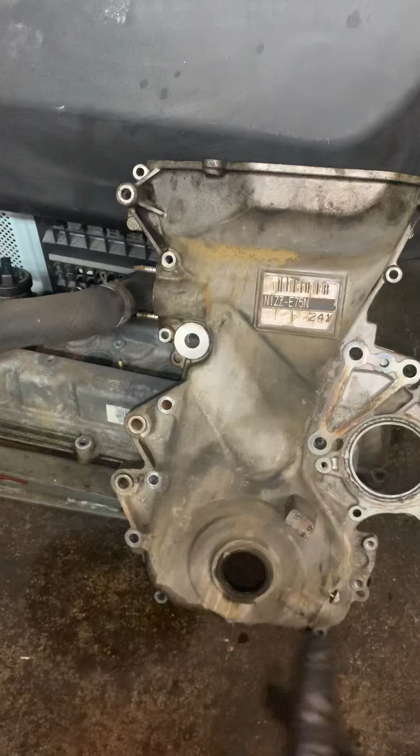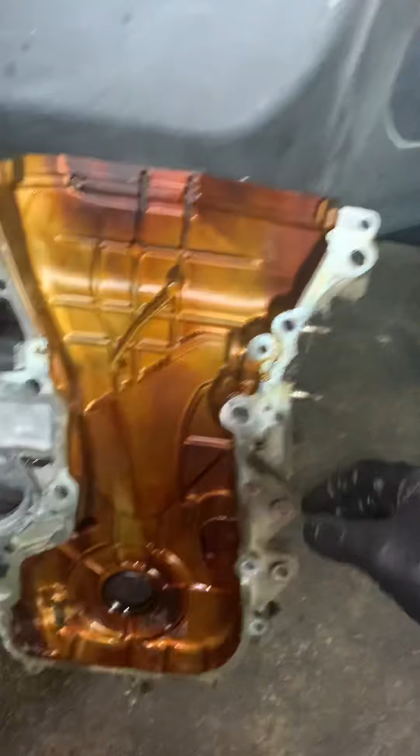Okay, so we're doing a lot to it. We're doing the timing chain. I'll start by showing you the cover that I have off over here. The timing chain was rattling inside of the timing cover. Your tensioner goes in here, and it's like a mechanical tensioner, and it goes in here and puts tension up against the chain, and when it gets loose, the chain will get loose and rattle up against here, and you hear rattling.

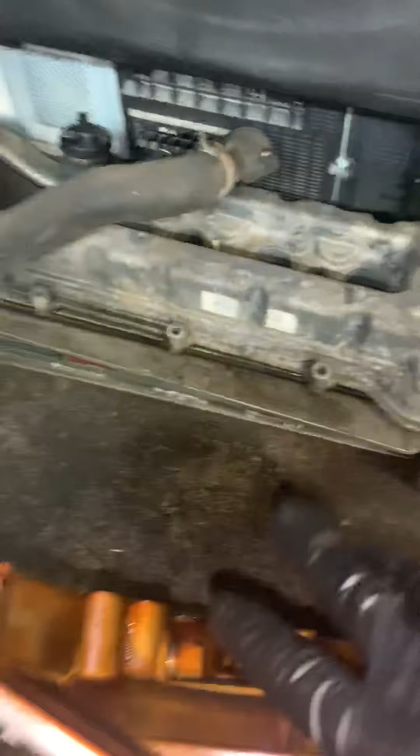So we caught it in time. I've seen it where people wait and keep driving it, and this will all be scarred up inside from the chain rattling up against it. Yeah, so we'll be doing the water pump, the new timing chain. This will be getting painted. The valve cover there looks crappy, and that'll get painted too.

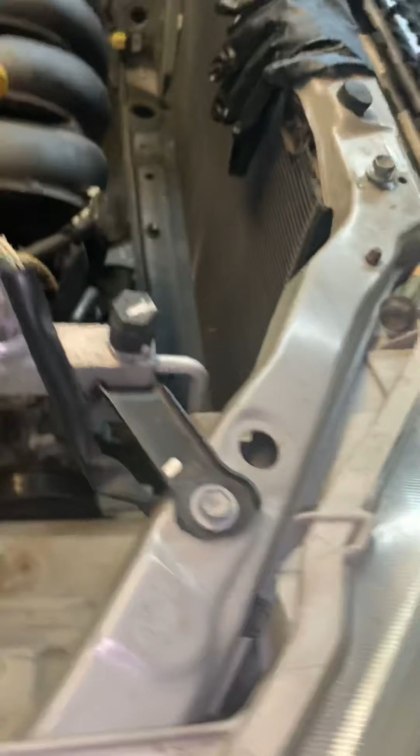Got the radiator out just to have a little more room to work with, because I have to lower and raise the engine, and I need that extra room there to move the engine around. So the inside of the engine is not horribly sludged up. It actually looks pretty clean.

I use this compression gauge tool.

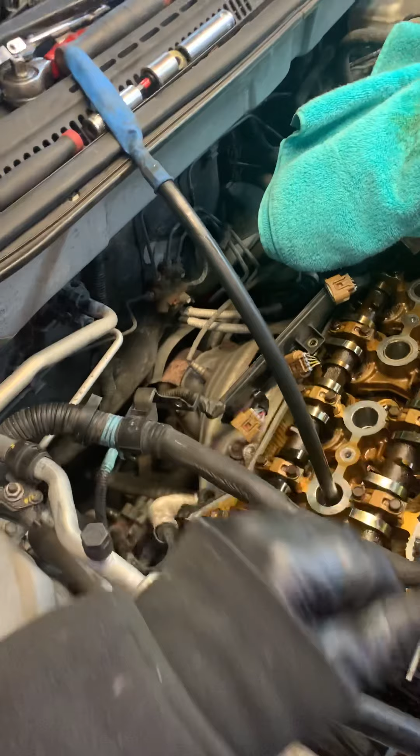Oh, excuse me. We're yawning on y'all. Been doing some late night work on this because I have other stuff going on in the day. Anyways,

I got this compression gauge tool in there, and I take the compression gauge off and put a little balloon in it. And the reason why I put the balloon in is because as I'm rotating, I'm looking for when that balloon fills up with air in cylinder number 1, and I know I'm on the compression stroke. Just a little thing I do to verify, to double check that I'm on compression stroke.

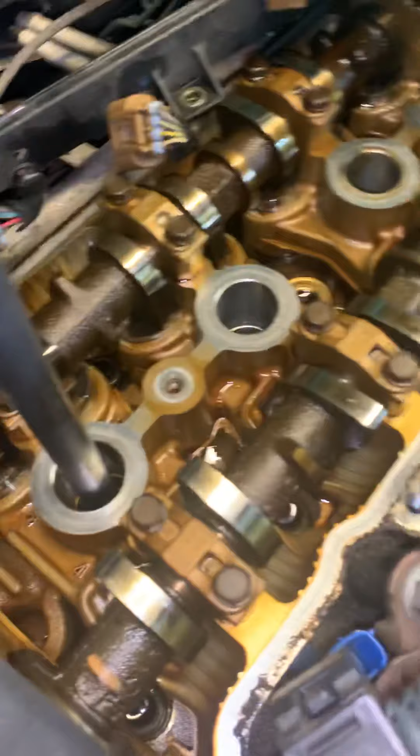Now you could also check if you're on compression stroke by looking at your intake valves to see if the lobes on them are up and if the valve is closed or open, and you could see that. So that's how you know the position of your valves. Then it has timing marks on the top, which I'll show you in a minute.

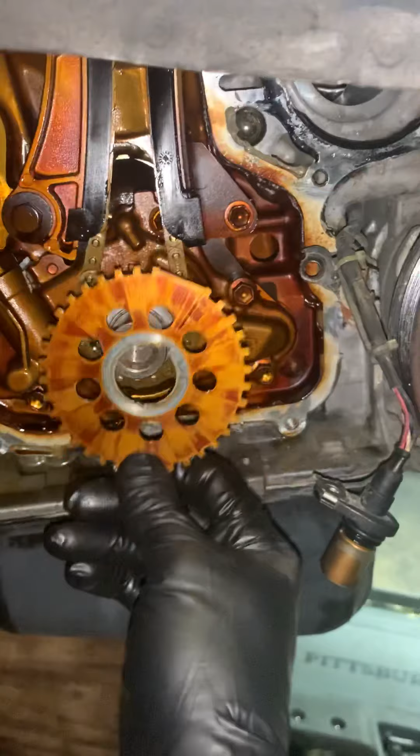Now that it's down, I'm going to show you the timing marks on the bottom before I jack it up. And so this obviously has the keyway, and the keyway only goes in one way, and then you have this letter F right there, and that letter F should be pointing up from what I read online. So then you'll take that off. It's pointing up the way it should. Set that out of the way, and then I'll show you the other timing marks behind there on the sprocket.

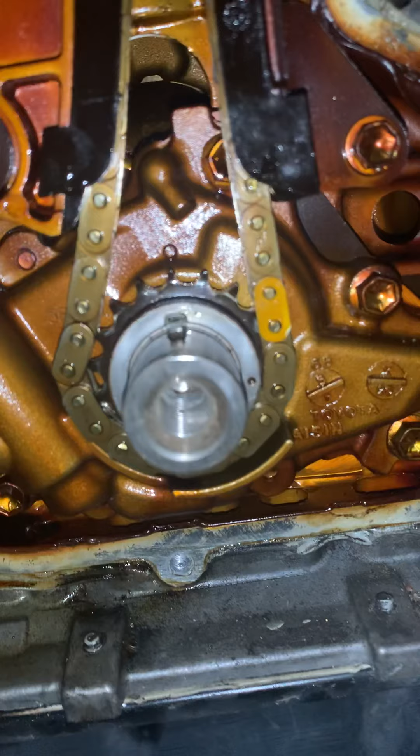See if we can get this crappy little iPhone to focus. Okay, so you see the marks. The mark here on the keyway lines up with that dimple back there. And then you have another mark over here that comes off to the side. So there you go. And the chain is obviously loose because the tensioner is off. That's the timing you're looking for on the bottom.

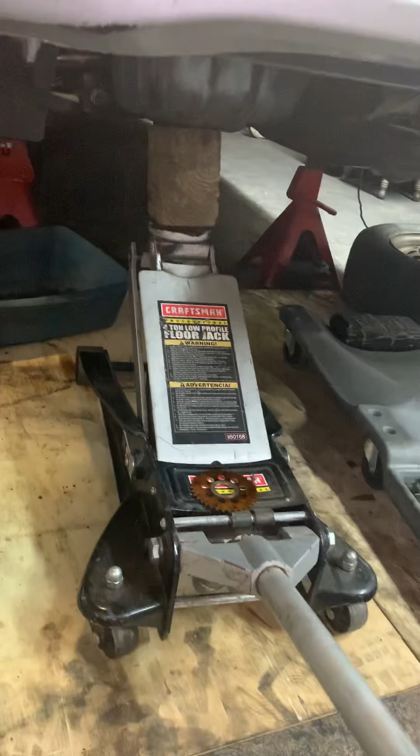You want that dot at about 3 o'clock, and then you want the keyway at 12 o'clock lined up with the dot there. Then you're gonna come up to the top here. Got our 3-ton jack on a piece of wood on the oil pan. And I'm gonna bring it up as high as I can. It looks like this piece of wood wants to slip, but it'll hold just long enough for y'all to see.

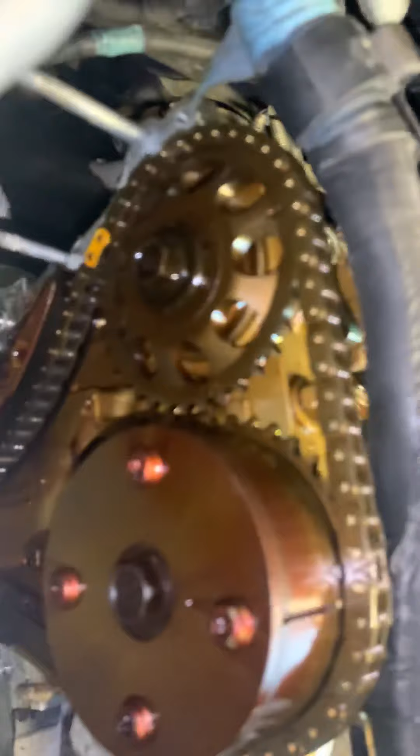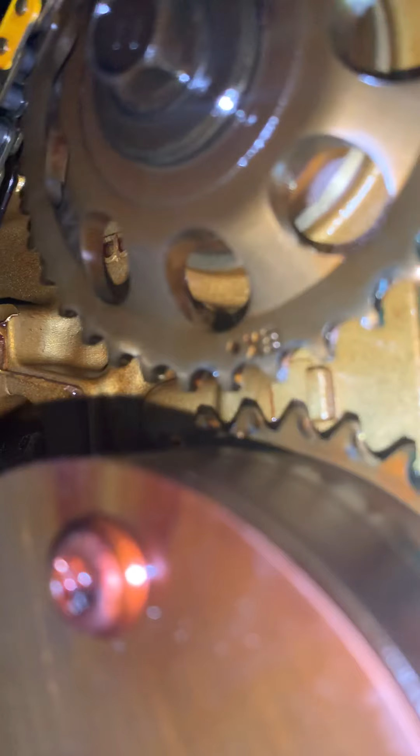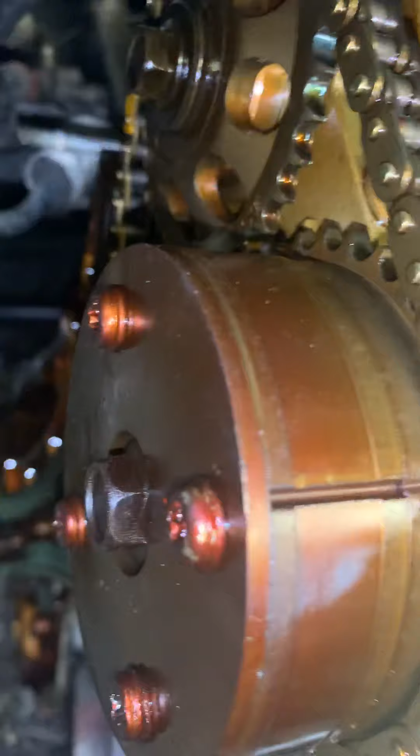Okay, so yes, I have to rotate the phone. So you see this dot here, you want it up at 12 o'clock, and then the other two most important dots are those two, the EX dot with the other dot across. You want them lining up. It looks to me like this mark matters too, like you want that mark facing up roughly about 12 o'clock like you do on that dot over there. So, and then the rest is just chain and guides.

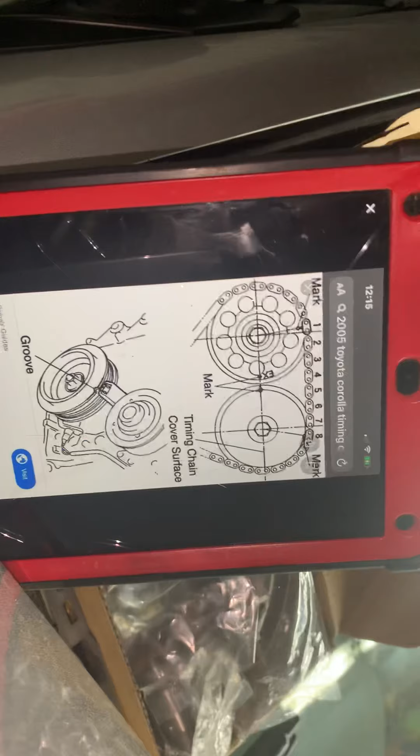So if you see here on my iPad, those are the marks they're displaying. They got the dot slightly off of 12 o'clock, and this one slightly off, but they're mainly focused on these two being straight across, the EX marks.

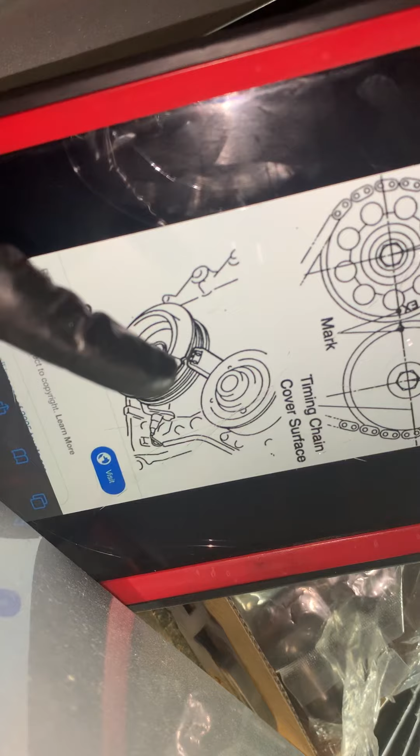On the timing cover with the crank pulley, you want the mark to line up on that also, which I did before I took it off. I made sure, and I'll show you that over here. And so your crank pulley is gonna have a little mark in it, and I just kind of made the mark a little more visible with a knife and a Sharpie. And you want that mark to line up on 0 over here, like that, before you remove this crank pulley and this timing cover.

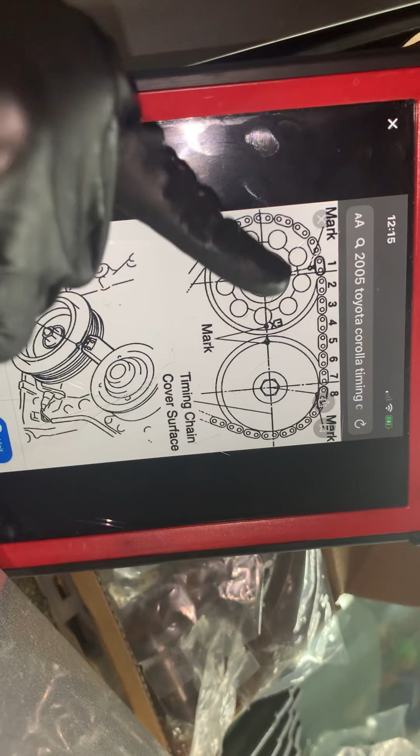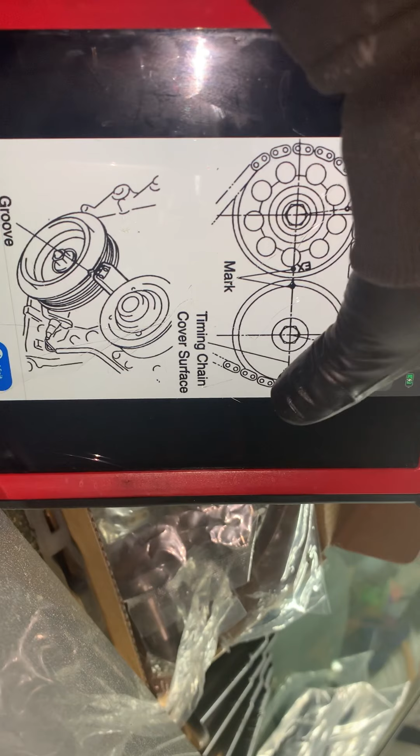And so when that lines up on 0 there with the timing cover off, you can see at the top of the timing cover, and you can verify that your two top marks have the EX dot across from the other cam gear. You have the VVTi on the intake side, which is this side, and then you have the exhaust on this side.

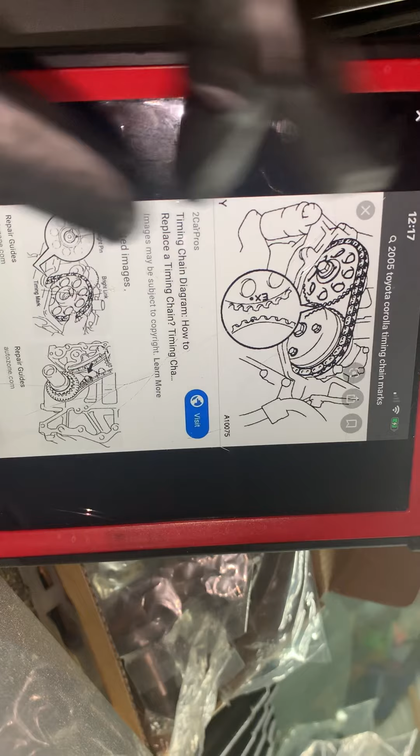So once those line up, they show you some other stuff here too. The marks on the bottom, the guides. Again, just talking more about the EX marks lining up there. Those are pretty much the most important. These are all your tightening sequence on the bolts for the cover.

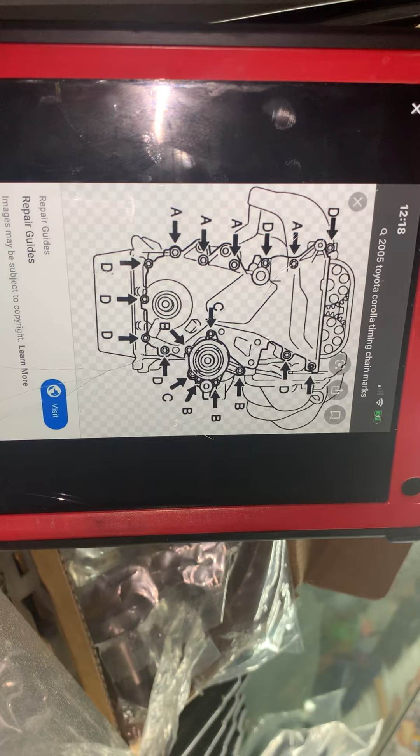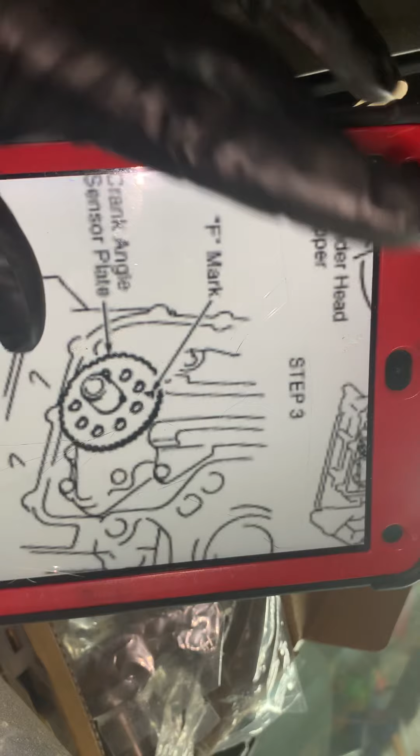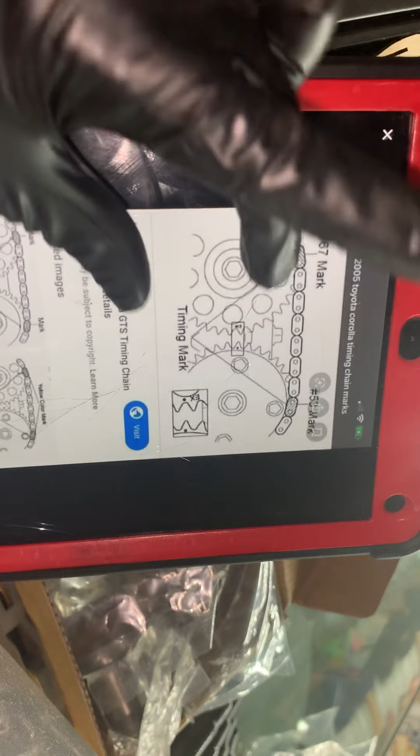There's the letter F pointing up, and your crank angle sensor plate. I already showed y'all that. Here is the tensioner, where it goes on to the guide. That's pretty simple to understand. And then here is your marks, and they're giving you the teeth count on the new chains because they'll come marked. And you want the center mark and the teeth here, and then the teeth marks to line up at the top. So that's pretty much it. Yeah, that's pretty much it.

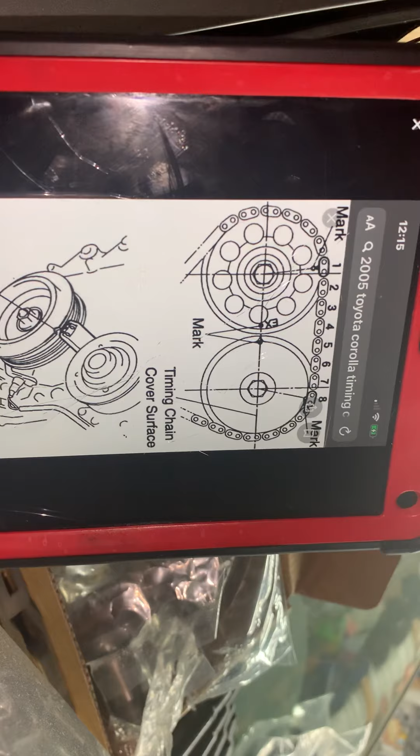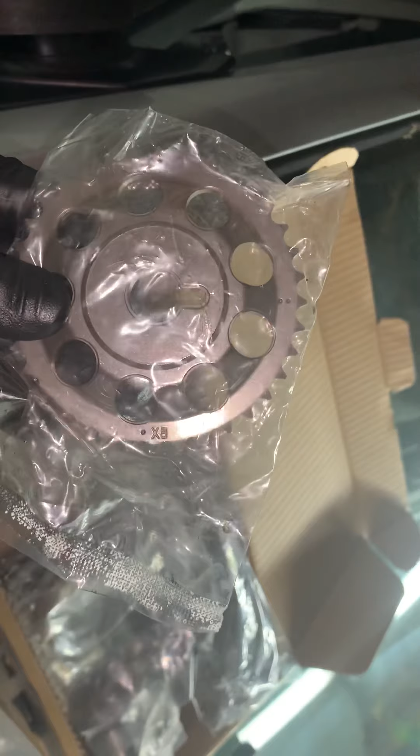So there's your timing on that, and then we'll move this out of the way, and we'll set that over there, and I'll show you these new components. So here's your new exhaust cam gear, and yes, it has the dot up top. It has the EX dot there. So this one I'll be taking off, and I'll be replacing with this one. Now, technically, do I have to? No, I really don't. There's nothing wrong with that one. If I want to, I can leave that one on. But whatever, it came in the kit, we'll replace it.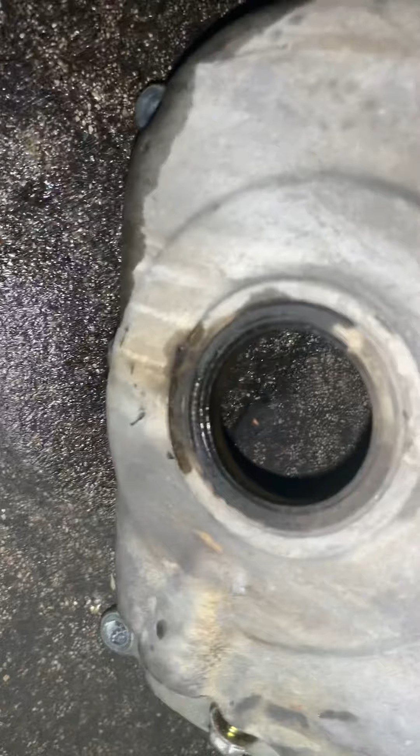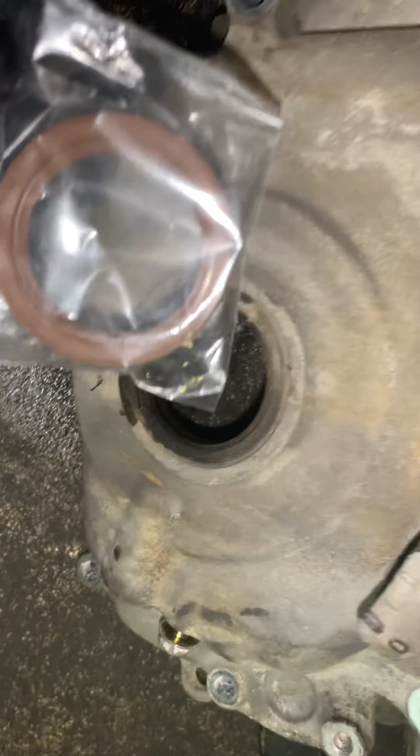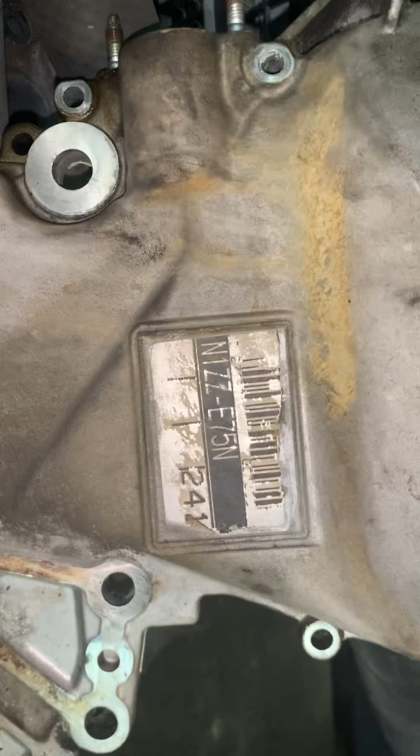These are your guides, and they're new. Also, you got one for each side. You got your crank seal, which is what goes here. And you can see this one was starting to leak. And so it's a good thing he bought this. So we'll replace that seal. I will pull it out after I paint it, because that way I can pull it out without having to tape it up while I paint it. You can just paint over it and pop that seal out and then put the new seal in without painting the new seal. I will probably be covering this up with some painter's tape so I don't paint over that and paint the rest. But yeah, there's your seal for that.

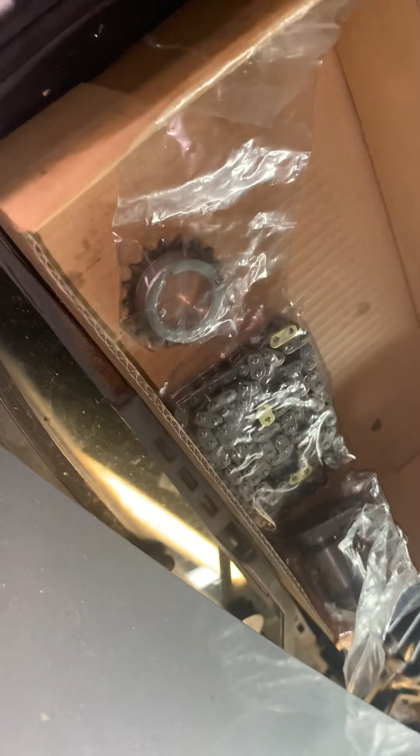We'll leave that there. And then this is the sprocket for the bottom crank. I believe this is pressed on. If it slides off, then we'll replace it. If I gotta torch it off, I might just leave that bottom one on, because in all honesty, there seems to be nothing wrong with the one on the bottom. It didn't get damaged, but we'll see if it slides on or off. I haven't got to that point yet.

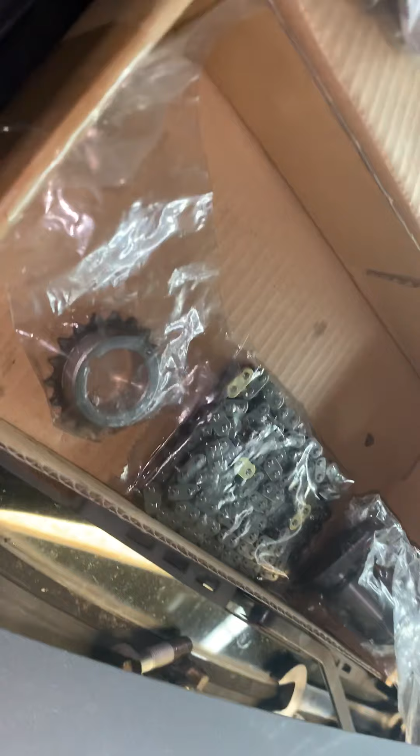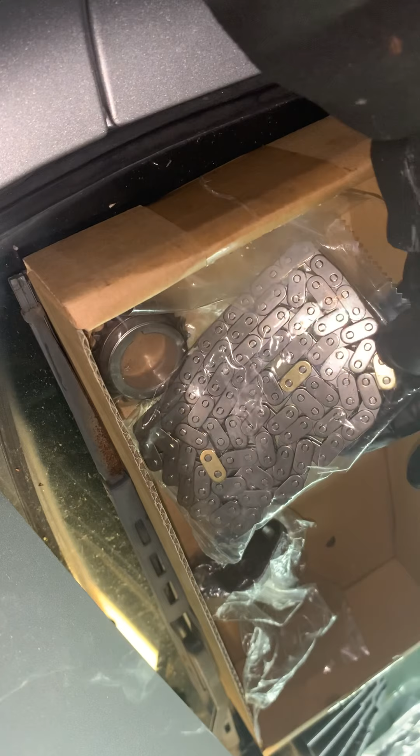Here's your tensioner, new one. I thought this was hydraulic, but it's mechanical. It has that little lock right there. You see that little lock? That little lock pulls back and boom, it unloads, and it has some kind of little teeth here that pop out. I was looking at the old one, that's how I know. Here's your new chain with the gold marks for your 3 main timing marks. The 2 on top and then the 1 on the bottom. So that's pretty much the whole timing kit there. And then there you see the valve cover gasket set.

We have ourselves a Dayco serpentine belt. Part number 6PK1535. And a set of NGK spark plugs. And these are the 7090 NGK stock number. So there's your spark plugs that'll be going in the hole there. And we have ourselves a water pump that doesn't want to come out.

One-handing stuff while you record with the other hand. So much fun.

So here's your new water pump in the package. So pretty. And then there's your gasket for it. And then there's all our other parts over there. Let me come around and show you that. What do we have here? We have, ladies and gentlemen, a Wix XP oil filter. Number 51394XP. Best oil filter for any car. We have a synthetic high mileage 10W30. And we have, by Valvoline, the gasket maker red RTV for the valve cover gasket.

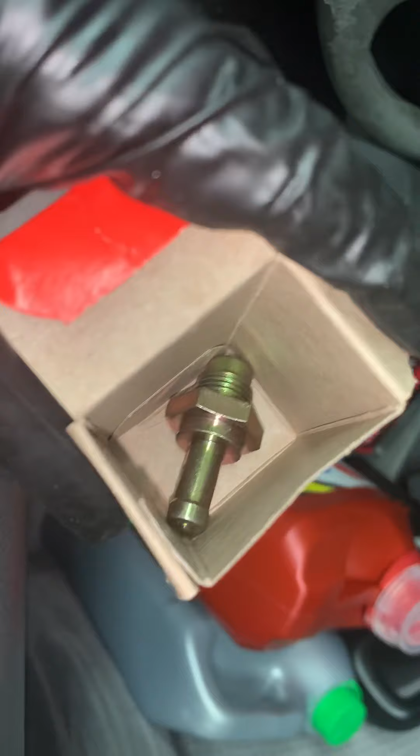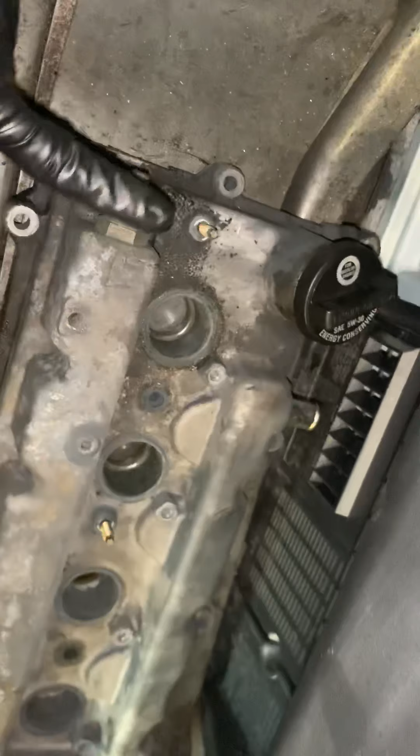And we have a PCV valve. Nice gold finish, threaded. So we'll be replacing that. And that sits on the valve cover over here for those of you that are like, where does the PCV valve go, Danny? It goes right there. This will thread out. I'll leave this one in when I paint it, and then I'll take it off. I'll crack it loose first. Important note, crack it loose first before you paint it. That way you can twist it back on by hand so you can hand twist it off after it's painted. It also gives you somewhere to grab that you don't care about while it's being painted, when you need to lift it up and move it around.

These threads I'll tape off. Inside of this hole I'll tape off. Whoa, choking. So we've got to grind this up, clean this up, and get it ready for paint, and let the paint sit overnight.

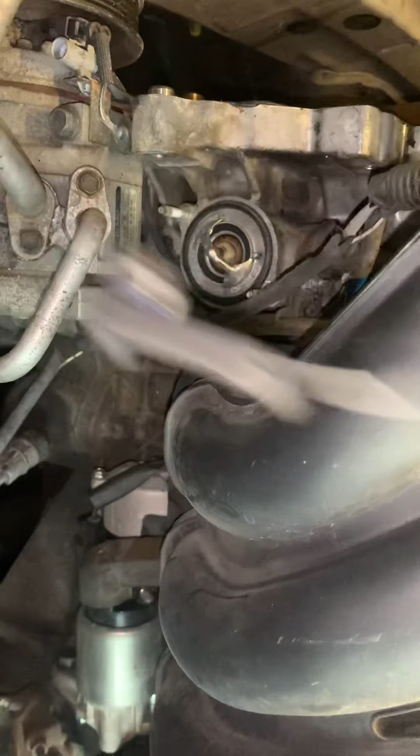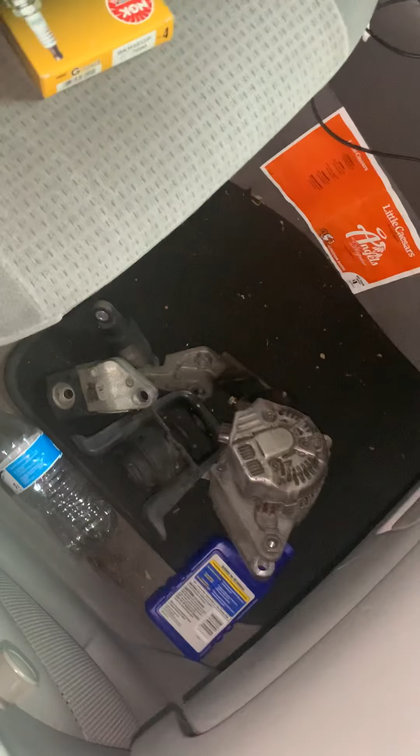We're dicking around with the thermostat on it too. What are we doing to the thermostat? Why did we pull the alternator off? Why did we do that? We could have left it on there, right? Oh, by the way, this one is a stick shift. That's what I love about these Corollas. Keep it a stick. So yeah, we took the motor mount off.

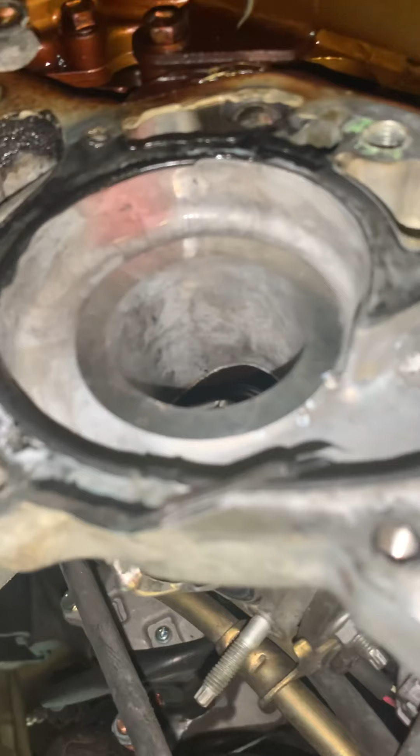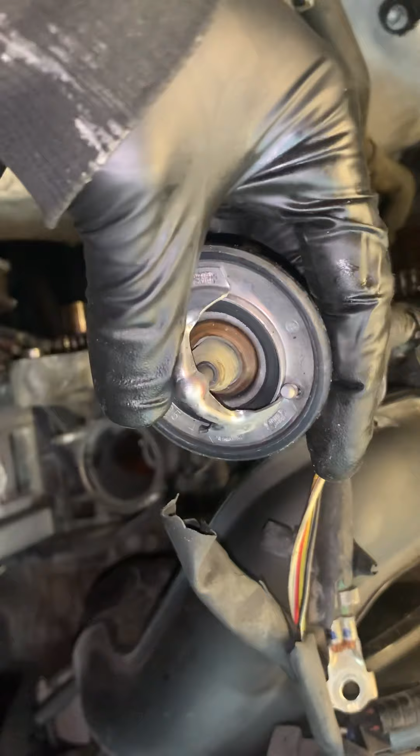We took, obviously, the tensioner bracket for the serpentine belt, which is what you see there, the motor mount, and then the alternator came off. And you say, Danny, you're a dummy, you didn't have to take the alternator off. Well, yes, I did. The reason why is because you don't do a water pump, which goes right there, and not at least inspect the thermostat. Now I know the thermostat was decent because it had been done recently, but I don't remember if I did it or somebody else did it.

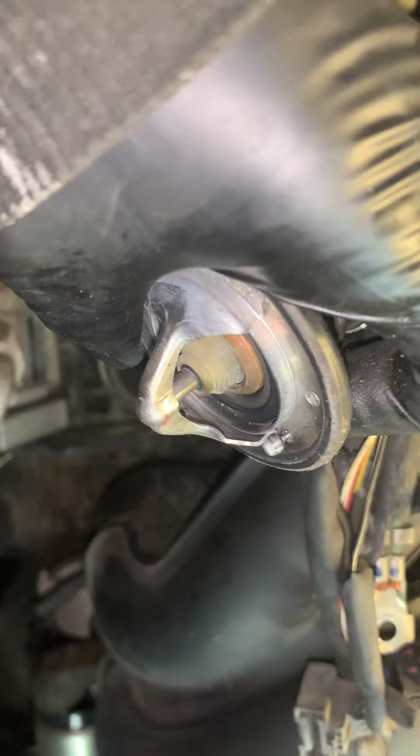You see this little bleeder nipple right here? That is getting chopped off of there. Then the hole would just be straight flow through without this little bleeder restricting it. That'll allow some coolant to flow there even when the thermostat's closed, relieving pressure and never allowing it to get to full pressure. But it still allows it to build pressure. It's not like if you were to completely hack the thermostat wide open like most people do. That's actually bad for fuel economy and other things in the engine.

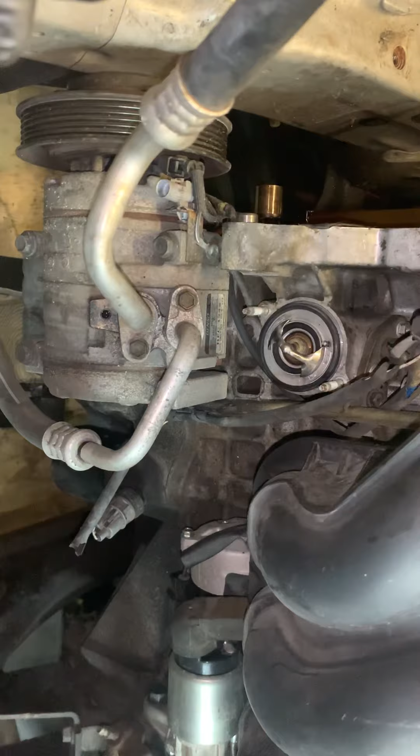But all I do is take that little nipple off. So I inspect it, make sure the thermostat is good. I put it in hot water to watch it open, to see at what temperature it's going to open. I have a thermometer that I check that with, and make sure it's still opening and working correctly. So now I know I can reuse it. I'll just chop the nipple off, put the housing back on it, and yeah. But you want to make sure that if you do a water pump and the water pump was leaking, you at least inspect the thermostat. So we pulled the alternator off to do that, and it gives us a little more real estate to work with.

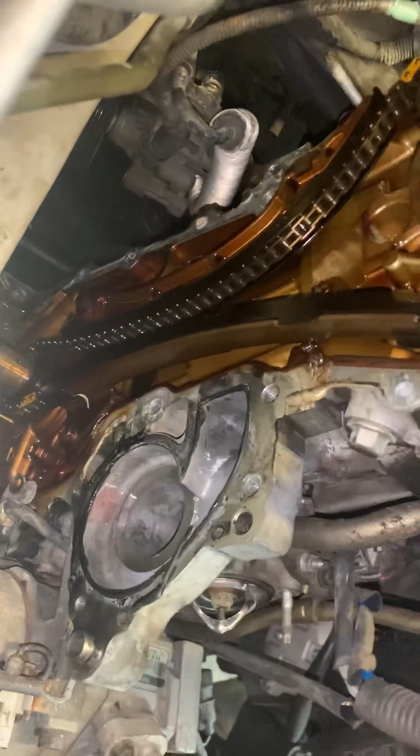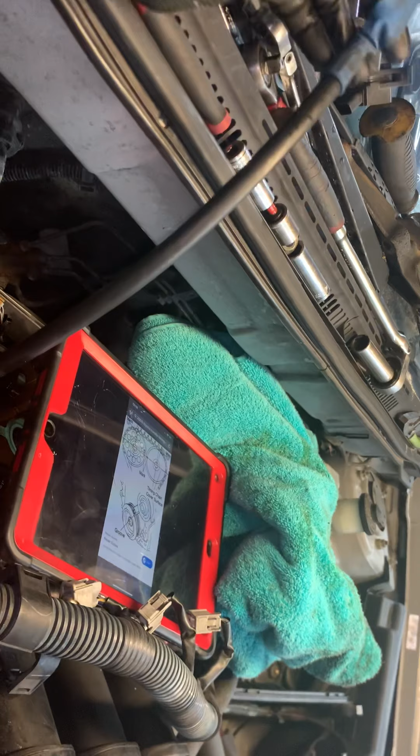So the next phase I'm working on here is taking off the guides, taking off the chain, the motor set in timing. I know I was on compression stroke because I had air in the balloon. Obviously it's leaked out by now. I've confirmed all my timing marks, which I've already shown you and don't want to bore you again with. But yeah, that's about it.

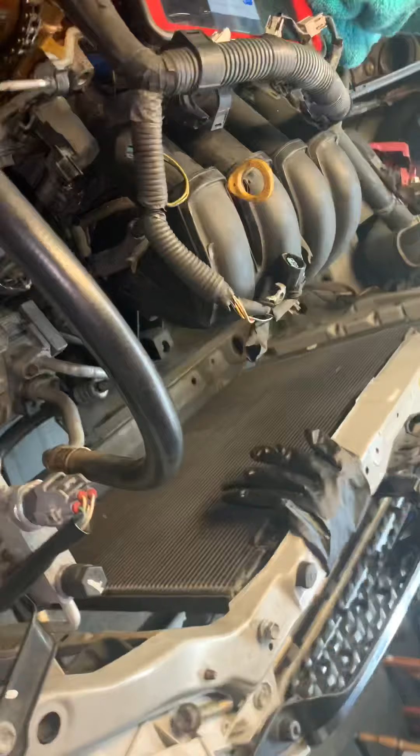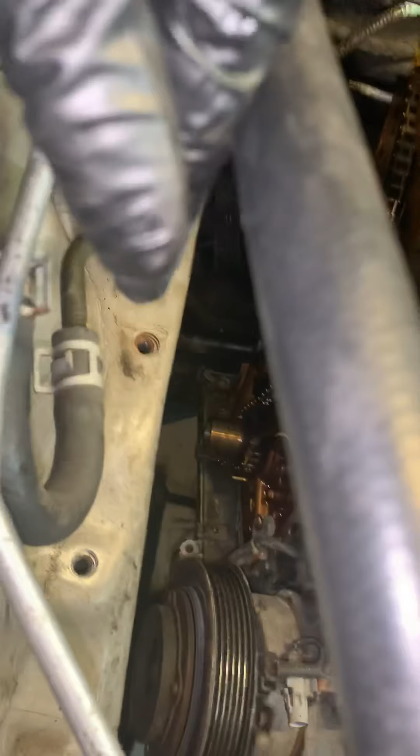Oh yeah, you say, Danny, why did you take the radiator out? Well, I didn't have to, honestly, but I like working with a little more room, and I had to take that alternator out, and I'm lifting the engine up and lowering it, and it's going forward and backward, and I got the lower subframe bar and that motor mount loose. I got a couple things loose because the engine wasn't dropping down enough by just releasing this motor mount. God, I can't stop yawning during this video. So I ended up having to release that bar and take that motor mount out to get the engine to drop down low enough.

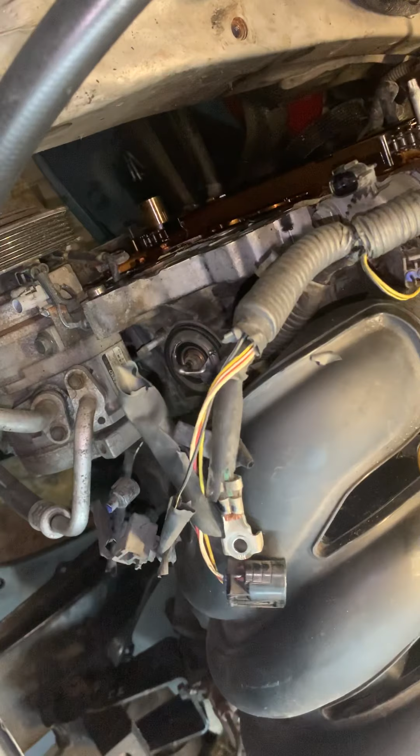Alrighty, so by doing that, you get the engine down low enough to where you can clear this piece of the frame here, the pillar there. That gives you plenty of room to work with over here and release your bottom bolts for your guides. I was looking at these guides. I mean, this thing was rattling and all, but these guides don't even look that bad. But the plastic does get old and brittle, so we're going to go ahead and replace them anyways. We've got it here anyways.

I'm going to pull this chain out and compare it to the new chain and make sure it didn't get stretched. If it's not stretched, seems to be better quality, and is the same exact length, then we might be putting this chain back on, and if not, we'll use the one that came with the kit. But sometimes the ones you order in kits online aren't that great. So anyways, just wanted to show y'all this. Got the motor down out of the way. I'll be cleaning up the bolts. Oh, here's your old tensioner. This is the component that failed.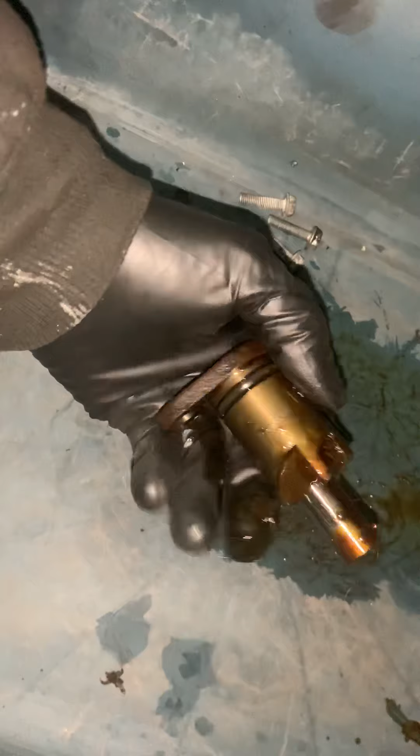And as you can see, it's mechanical. And you gotta, I can't do it with one hand, but you bend this thing back with a flathead because it's biting on. See if this camera's out of focus, because that bites into the teeth here. And then you could decompress this, bring it back, and attach with this little thing back to there, and that's how you lock this back down, and that's how much it extends.

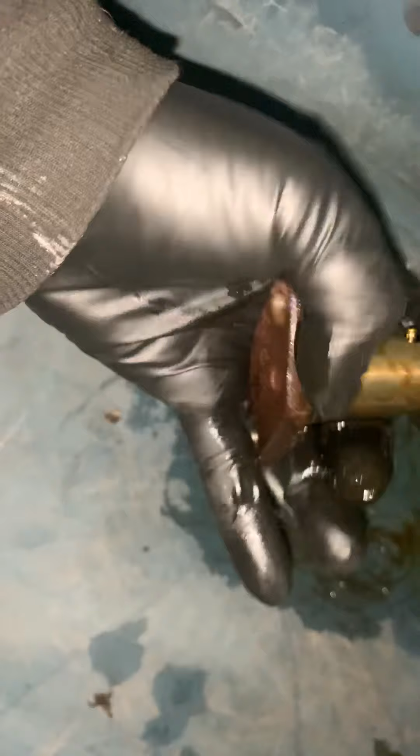And then obviously you got your O-ring sealer here and your 2 bolts that come in on the opposite end.

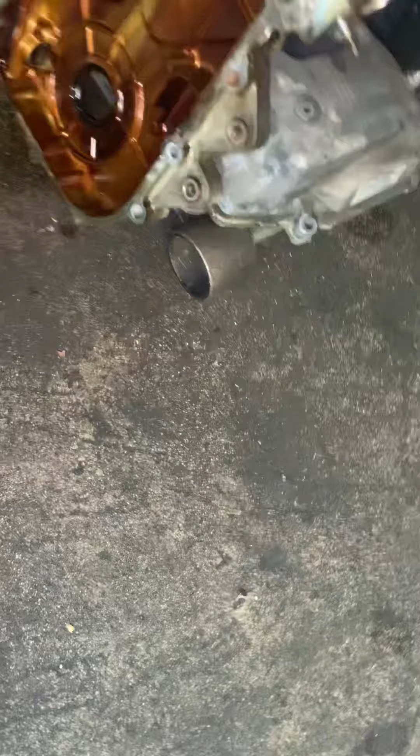And there's a guy that did a video, and with all due respect, he did a really good video on this, and feel free to go watch his video because he did a good job. He was very thorough, but he had a very strong accent. And I'm not one to make fun of anybody or beat them up over having a strong accent, but it was hard to understand him the way I wanted to be able to understand him.

Okay, there we go. I had it backwards because I'm looking at the camera and not at the actual part. But anyways, this will sit in here like this, and then it'll pop out, pop, and put tension on that chain and on that guide. And as long as you got your timing right, once you put this in, bolt it down, release the pin, all that, it tightens up on the chain and you don't have chain rattle.

And this only goes in one way with the teeth facing towards the back of the cover. You try to put it in the other way and it won't let you. It has one position that it goes in, that the holes line up in. So anyways, there's your water pump hole. All this has to be cleaned.

I'm gonna clean this. I'm gonna leave that seal in for now. Clean all this, paint. So that's what I'll be doing for the rest of the night. Let the paint dry. Tomorrow, put the seal back in it. Do the same thing to this valve cover. I gotta do a lot of cleaning tonight. Grind all this off. This I will paint over, this sticker. I'll just grind that right off.

Crack the PCV valve loose. Get all this nice and clean. Cover up the holes where the spark plugs are gonna go. I don't want paint all up inside of these holes, so I'll cover these holes up. And we'll get that valve cover nice and clean and painted. We'll get that timing cover nice and clean and painted. We'll put this new sprocket, these new chain guides, we'll put all those new parts back on it tomorrow.

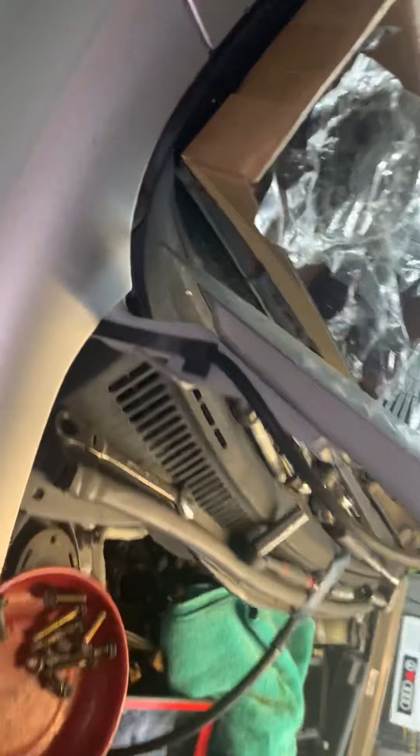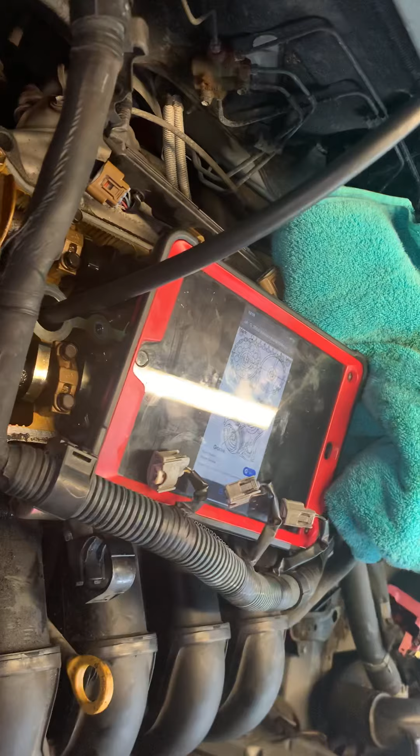So today was get this thing taken apart, do a compression test, verify timing. Tonight, we've done all that, so we know for sure we got the correct timing marks. And yeah, I'm gonna spend the rest of the night grinding and cleaning.